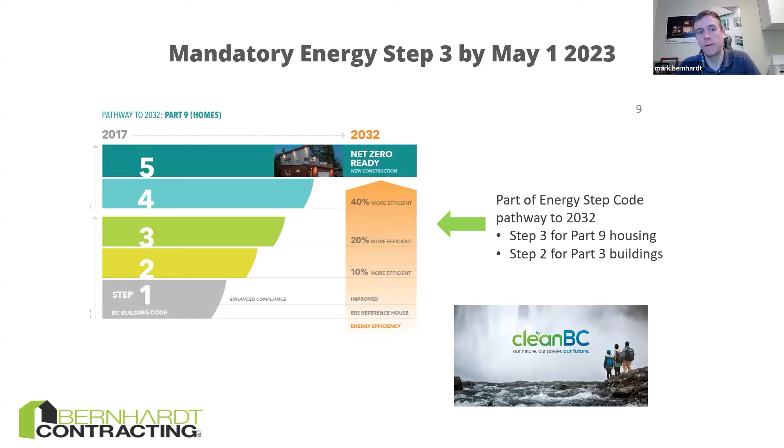So to get on it here, zero carbon step code. Let's see what's going on, I gotta find the right button here. There we go. Energy step code has been mandatory now in the province for some time, at the middle step. So by now, basically all builders should be familiar with this and have been using it. Really, this tackles one part of our journey as a building industry, and it tackles really only the energy side of things.

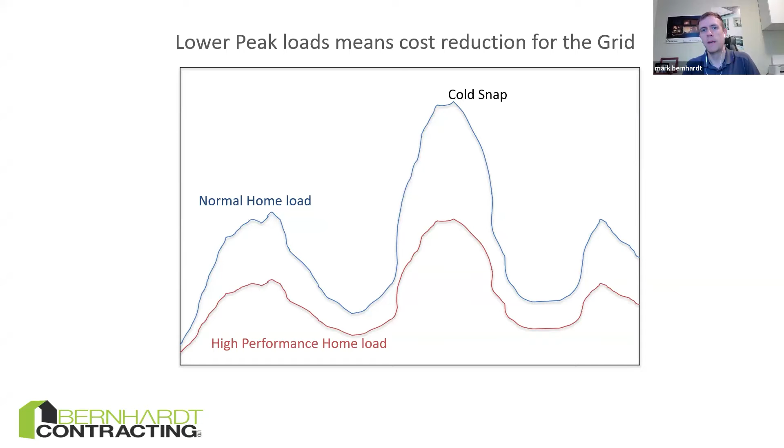Now energy is a big piece because these two codes do go hand in hand. When we imagine the energy use of a building, a normal home has a cycle - you'll peak up during the day or evening when you're cooking, you might have a cold snap and the peak load of the building gets really high. So your energy profile might look something like this - this isn't real data, I just drew this line with a pencil, but you get the idea. We can imagine what that would be in a normal home. A high performance home, like a step 5 energy step code home, will look something more like this.

And that has some pretty big benefits for us as a province, as a society. Now all of a sudden we can spend quite a bit less on our grid. If we imagine the peak cold snap of a regular house is using 971 jiggawatts - not a real unit of measure, but more fun - and the house that's using less is using half that, now we have to transmit and generate half the energy. Particularly problematic are those peak loads - we saw in the news lately that Alberta was having brownouts, and that's because of peak loads, typically not because of the base loads. And that's what energy step code is dealing with.

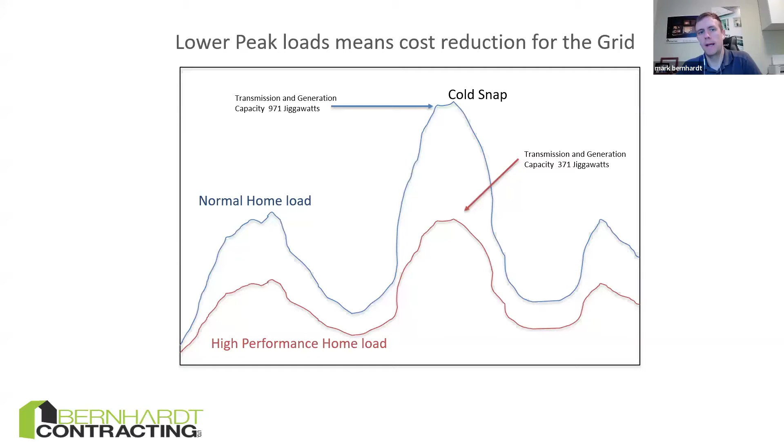It really needs to go hand in hand with the zero carbon step code, though, because energy step code deals with energy but not emissions. The second piece of this environmental code push is the emissions code, and that's where we need the zero carbon step code. When energy step code first came out, it was a little bit awkward because it was marketed as sort of the environmental solution to building. However, you could have a step 5 energy code house and still have a huge amount of emissions because you can hit that with a fossil fuel burning heating system. And if you had the lowest possible step house, as long as it was an all-electric system, its emissions were still a fraction of what that highest level gas-burning house was.

So that was a little awkward, right? It didn't really solve the problem of the emissions and the climate change parts of it. But we do need them both, because if we're going to successfully electrify and reduce those overall emissions, we do need to reduce our energy use as well to make that a practical, all-encompassing solution. So they go hand in hand. It's not one or the other; it's both, and we do need them both.

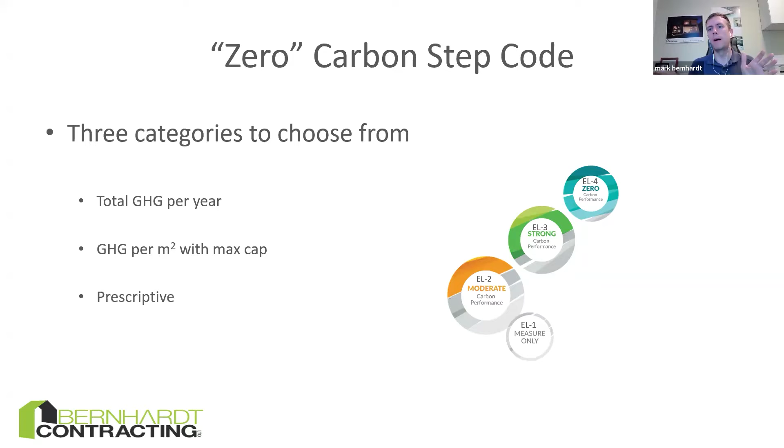Usually I'll separate that out and I'll say things like, this heating system is EL4 ready. What that means is if this heating system was used in a house, assuming everything else complied, that this house would meet EL4.

We are expecting that the first real proper implementation will still be measure only, sometime either end of this year or beginning of next year, with the medium being pushed to likely very late 2025 or possibly a little later, hopefully not much later than that. We'll get there. Is it as fast as the original timeline? No. But there's some political reasons for that, and some parts of the province aren't as ready as others.

It is a provincial code, and that's kind of one of the good things or the annoying things, depending on where you stand. A provincial building code kind of needs to be a one-size-fits-all thing. You have some flexibility in the ability of municipalities to adopt it and move faster, which my home municipality of Saanich and several others nearby have done. They've gone to zero carbon right away. Here in Saanich, that's fine, it hasn't been a big deal for builders, we're already well on the way anyways. That's worked quite well, but other parts of the province are not quite as ready. For a province to mandate something, we need to be a little bit more careful than we might need to be in Saanich, for example.

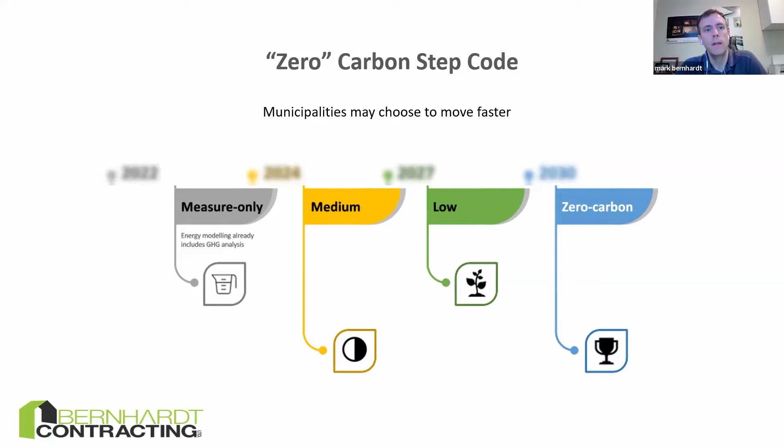There are generally three or four different levels. Measure only is obviously just status quo, we're not really doing anything, we're just giving you a result, which we've actually been doing for a while. But generally, as we step down, this is how it's supposed to look: at medium, we're decarbonizing the heating system - it's not always the case, but that's sort of the goal. At low, we're decarbonizing the heating and the hot water. And at zero, we're supposed to be decarbonizing all systems. What I mean by all systems is not actually all systems - there's some details to look at there, but that's generally the intention of the code, to have this step-down approach from one to the other.

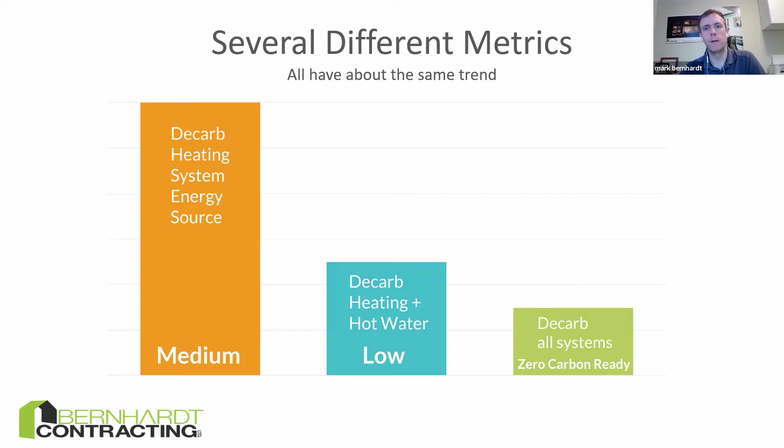As far as permitting goes, there has been a new permit form for the province that has been made. Our team made it. We're quite happy with the colors and things like that we chose.

Secretly, your energy advisor's been collecting this data the whole time. It's not any new work for an energy advisor, it's been on these forms - in fact it was on the old ones as well, but now it's just a bit more prominent. The zero carbon step code level is on page 1 of the form, and it says what is required and what your house is proposed to meet. So it's there, it's no extra work for your energy advisor to do this, no extra energy modeling required - it's all built in.

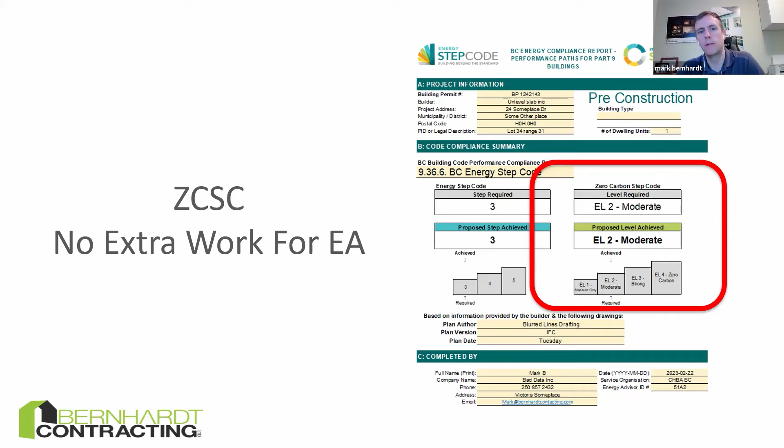Now, getting into the details of this code, this is really where things start to come out as to where we can be effective with this code, where it might need adjustment, or where there is potential relief for those worried about some parts of it. It really matters what we're counting and what we're not counting. I've mentioned that zero does not mean zero, and all systems does not mean all systems. So let's look at what I mean by that. What are we counting and what not?

Principal heating system, that's the heating system designed to take the entire load of your house. Maybe that's a group of electric baseboards, maybe it's a heat pump, maybe it's a gas furnace. That is going to be counted within this code, fully counted.

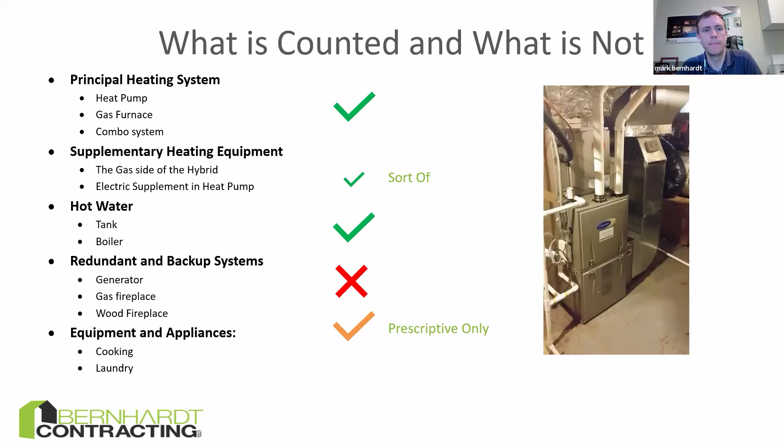So let's dig into some data here.

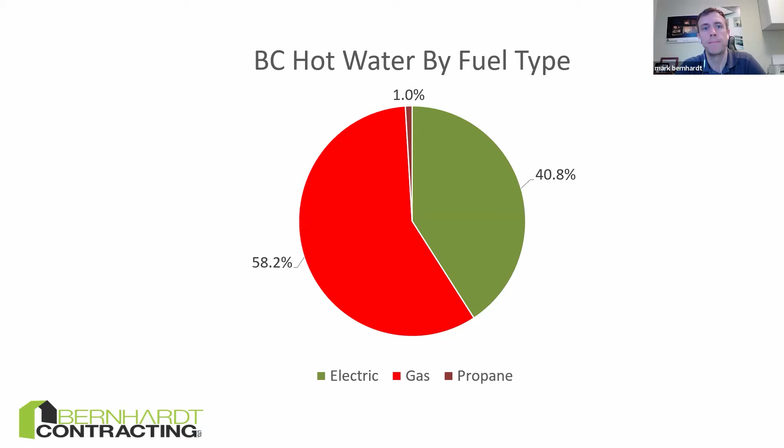So when we break this down, we do see that about one-third of the homes in BC are what I'd call EL4 ready—already doing what they need to do to get us to that top step.

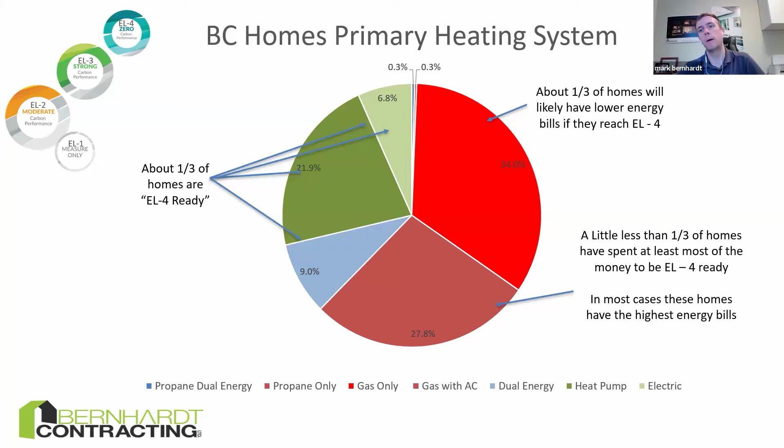And that would include that blue area, which is the dual energy, because they have that heat pump in the mix - they're good to go. About a third of homes are using gas only, and as a result they're probably having higher energy bills than they would had they installed at least a dual energy system at some point.

The one I'd really like to see change quickly is the little less than a third of homes that have spent most of the money to get to EL4, but aren't using their systems to full potential. If you're installing gas with AC, you already have a trade that knows how to install a heat pump, the wiring, the power capacity, indoor units that are very similar or identical to heat pumps, and an outdoor unit that's very similar or identical too. So why not just get a heat pump?

I think this is really low-hanging fruit, that roughly 27% there. In many cases this group will have the highest energy bills of all the groups, because you're getting the worst of both worlds - you're not using the full potential of the system you've already paid for.

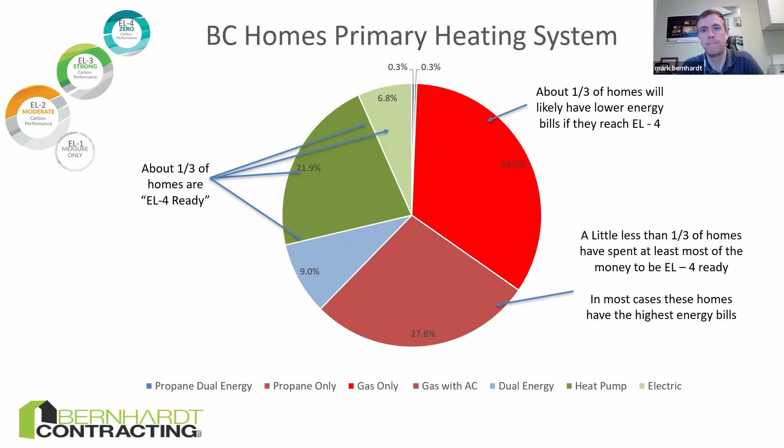So this is really low-hanging fruit, a place we can do a lot better very quickly. And as I've mentioned before, this is a very regional thing. If we look at Vancouver Island, we're about a quarter not EL4 ready. In Kelowna, they're about a quarter EL4 ready - it's opposite. But notice in Kelowna 71% are using gas with AC, meaning they've already paid the money to have the equipment to be EL4 ready. Let's just make that jump - this is very, very low-hanging fruit.

Interestingly, as we go up the energy step code, this table shifts quite dramatically. On Vancouver Island, going up to step 4 from step 3, the EL4-not-ready percentage only drops down to about 10% of homes - a very low percentage of homes not already ready on Vancouver Island.

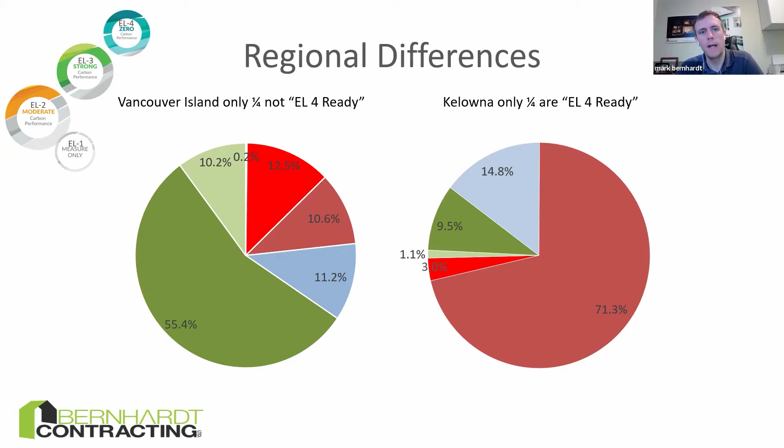And some low-hanging fruit elsewhere too. Where I see this policy being easy or not easy is really regional. In areas with less cooling - where cooling isn't common, like maybe Vanderhoof - you're probably not installing any cooling equipment, so there's probably not a trade in town, and not much experience with that. That's where this policy may run into issues and hurdles.

In areas like the Okanagan, central interior - anywhere you're already installing cooling, even if mostly a gas region - you already have the trade, the power capacity, all these things. The supply chain is there to make that switch very quickly and cost effectively. In those more northern areas, that's probably where we'll see the speed bumps.

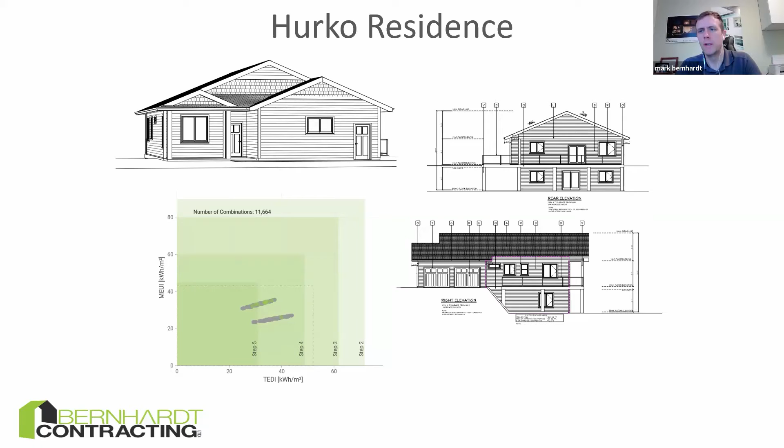I want to look at an example house - this one's actually in climate zone 6, in Quesnel. Nice little house. I really like it because it's kind of your average Joe type house, literally built by a guy named Joe. I wanted to show where this house falls.

If we look at the data across the database, most houses show up in that zero carbon ready zone. Actually, I think this might be a database for Vancouver Island only, because of that big spike in the green - so this might be what Vancouver Island looks like, not the full province. But if we plot where the code falls on this, we see the levels roughly line up: everything on gas, one thing on gas, and then nothing on gas. Why the gap between zero and strong is so small, you'll have to ask the code makers - it's actually a pretty hard target to hit that little zone, and very few buildings actually hit it, so there's maybe an argument we don't need that zone.

But if we take this house and just build it code-built using all gas, no surprise - it hits way out in that area, and it's not going to qualify for much.

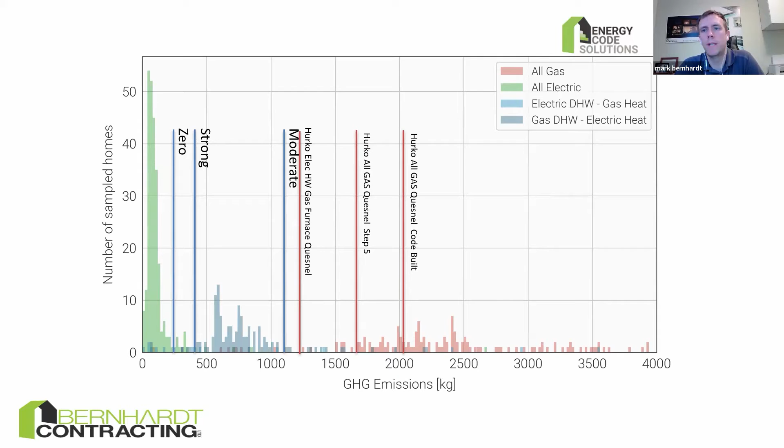If we build it to step 5 of the energy step code, we take a big jump down. Makes sense, we're using less energy. If we go electric hot water tank, we take another jump down, but that's starting to look scary because now we haven't even moved into the moderate zone on this particular metric. But luckily we have those other metrics, and actually these two scenarios do qualify moderate on the other metrics.

If we keep going and move that house to Victoria and make it step 5, we can qualify moderate because Victoria is warmer, we're not using as much heat. If we take that house and do a hybrid heating system, we take another jump down. If we take that house with a hybrid heating system, or dual energy system as I've been calling it, and electric hot water, we go all the way to the top.

So we've still got a gas furnace in this house, but the majority of that heating is going to be done by that heat pump, and the gas only comes on when it's very, very cold. And electric hot water, which would be cheaper to install. So we can get there relatively easily.

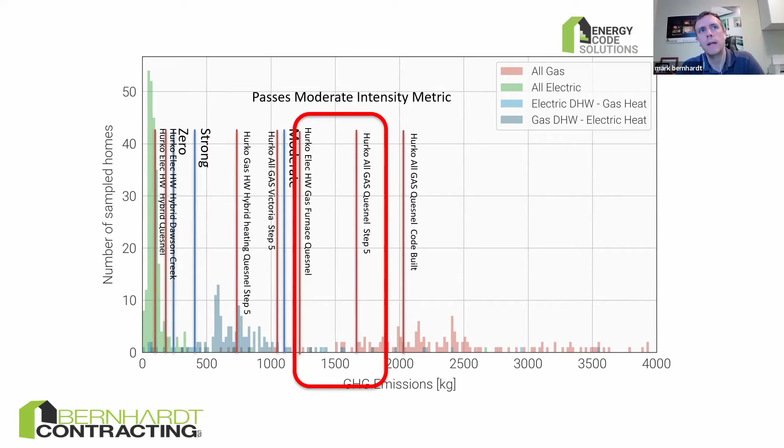If we take that house and put the same thing in Dawson Creek, it does move up a little bit. It's colder, but we're still well within that zero target. So it's quite possible. Wanted to divert now to talk about heat pumps in cold climates.

I've just introduced the idea of using a heat pump in Dawson. Pretty cold there, not necessarily seen as the ideal location for a heat pump. But it is certainly possible. Whether it's practical today, we'd have to talk to people on the ground there to see, because there may be a lack of trades and all sorts of things. This is a market that's really just emerging in these areas. It's not something you can walk down to your local hardware store and pick up the way I can here in Victoria. But they do work.

This picture I'm showing is actually in northern New Brunswick when I was out there doing some things. I thought it was really funny - it's this old church, uninsulated, and they've got three heat pumps lined up outside. They actually converted from an oil furnace. The reason I know that is because I was taking pictures of the church and the priest came out and said, 'Oh, are you interested in the architecture of the church?' And I said, 'Well, actually, sorry, I'm only interested in your heat pumps.' He thought that was weird, but Catholic priest being forgiving, talked to me about it anyways.

So apparently they basically couldn't do mass in cold temperatures because the uninsulated church meant the oil furnace wasn't keeping up. They switched to these heat pumps a number of years ago - they're not new. And now they can have mass at minus 30 and the whole church is warm. So they do work. What they've done is propped them up off the ground so they're out of the snow, and covered them because they get icicles dripping off the roof, to protect them from that and the deep snow, and they're working very well.

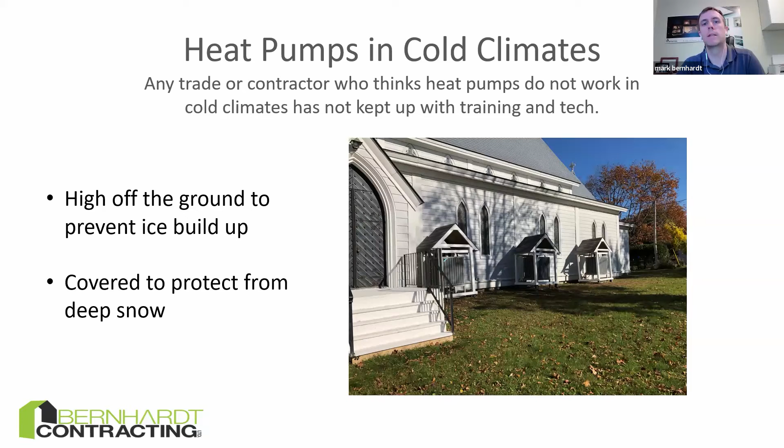So they absolutely work. Anybody out there telling you that they don't work maybe needs to update their training. They absolutely do work. But there are some other considerations we want to take into account.

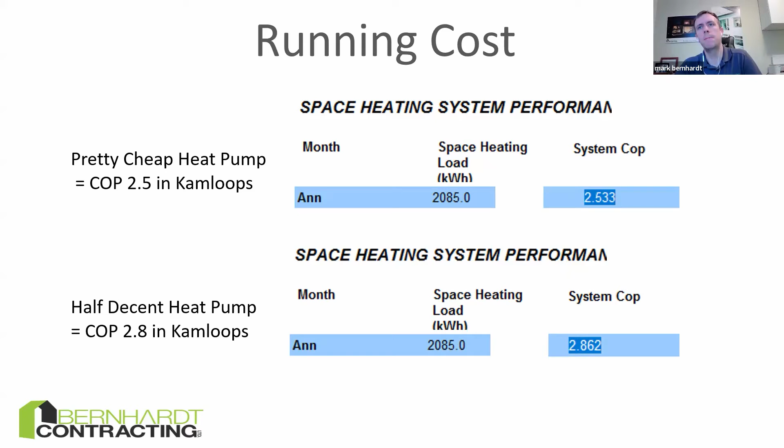If we look at something like this in places around the province, take a pretty cheap heat pump and put it in that house I was using as an example, and move it around a little bit. A pretty cheap heat pump, if it's in Kamloops, is going to have a COP of 2.5. What I mean by COP is coefficient of performance - that's 1 kilowatt of electricity goes in, 2.5 kilowatts of heat come out, so we'd call that 250% efficient. If I make a half-decent heat pump in that same house, it's going to be 2.8 - better heat pump, better results.

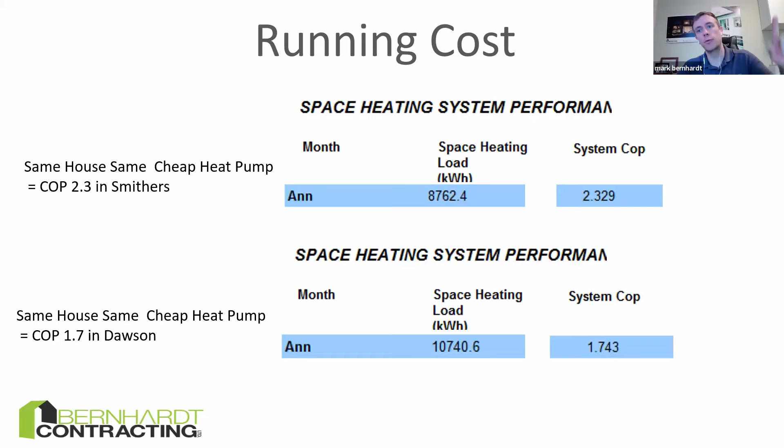If I move that around to different places like Smithers, I get 2.3 on the cheap heat pump. And then if I move to Dawson, I get a 1.7 - so 1 kilowatt in equals 1.7 kilowatts of heat out. Now why that matters is because we're all thinking about cost, right? Inflation and whatever, but we need to know what our running cost is going to be.

Often the criticism is that it's going to be way too expensive to heat with electricity, or my heating bills are going to go way up if I switch to electricity, because electricity sells for more money, which it does in most cases.

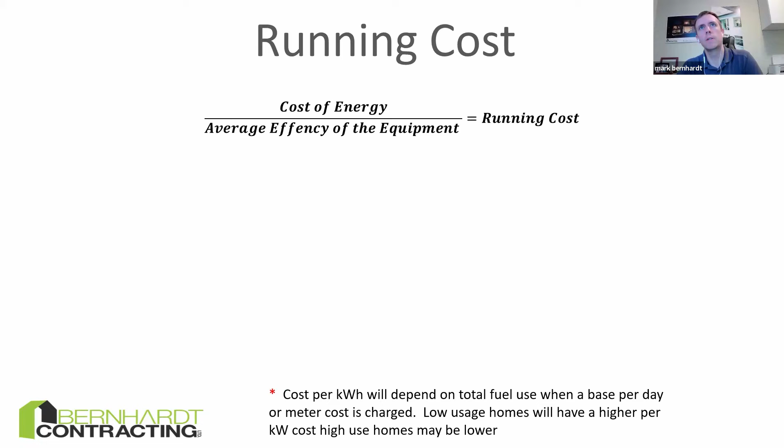So the way to figure this out is cost of energy divided by average efficiency of the equipment equals our cost to run it. Fairly easy to figure out.

In the north, you have Pacific Northern Gas, and they charge different rates in different towns, a little different than Fortis. In Fort St. John, they charge about 12 cents, at least last time they published their website. So 12 cents divided by 95% efficiency of the gas system equals a running cost of about 12 cents. In Vanderhoof, they charge 19 cents, which is wild that it's actually more than electricity there. So I have a running cost of about 20 cents if I'm burning gas.

In Kamloops, Fortis is essentially giving away gas for free, and what they're really doing is renting you the meter. That's how Fortis makes their money, the connection, and after that they don't really worry much about how much gas you use. That's why you see that caveat at the bottom: if you have a high gas load house, your per kilowatt gas cost is probably a little less; if you're not using very much gas, it might be a little bit more.

So take this with a little grain of salt. We can debate whether it's 6 cents, 5 cents, or 7 cents. Either way, it doesn't matter, the math formula is still the same. But that's going to come out to about 6 cents a kilowatt for running cost on that.

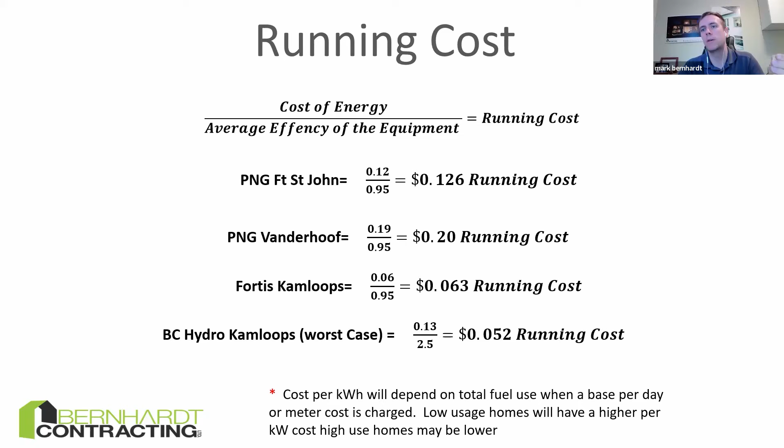If we take a really worst case scenario, BC Hydro, Kamloops again, the average cost of electricity is somewhere around 12 cents, but let's say it's 13 just for the sake of argument. If we take that 2.5 heat pump, that cheap heat pump, I'm going to have a running cost of 5 cents. So it is the cheapest option for running cost, simply because the equipment is much more efficient, and that overcomes the higher cost of the fuel.

Now let's look at the other piece, because you're often told that you're going to have a huge supplementary system, often called backup, to run these systems or make them work, since they're going to shut off when it gets cold, right? Well, if we're using half-decent systems, that's not quite true. It's not that simple, and there's lots to consider there.

So I'm using the example of the Samsung Hylex system here. It's a decent heat pump, and you'll notice it's actually labeled as a central air conditioning unit. This has led to a huge amount of confusion in the industry and elsewhere, where some of these systems are being installed and set to be air conditioning only, even though they are fully functional heat pumps, which is, of course, a huge waste.

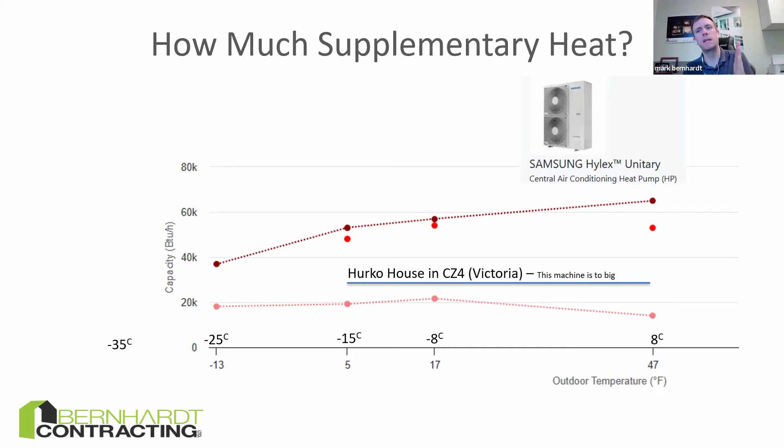This is the example I'm using, and I'm using that same house I showed earlier. If I take that house and put it in Victoria, this machine is actually too big, but you get the idea. Victoria minus 15 is like deathly cold, and we're not going to get much colder than that. So this heat pump would cover 100% of the load, it's actually a bit too big, we want to use a smaller one.

What we're looking at here is this top line is the upper end, the maximum this can do, and the lower line is the minimum this unit can do. What we want to be doing is sizing our heat pump so that we're always in that operational range of this house. So in Victoria, this machine is too big, we've got too much operational range above the line there.

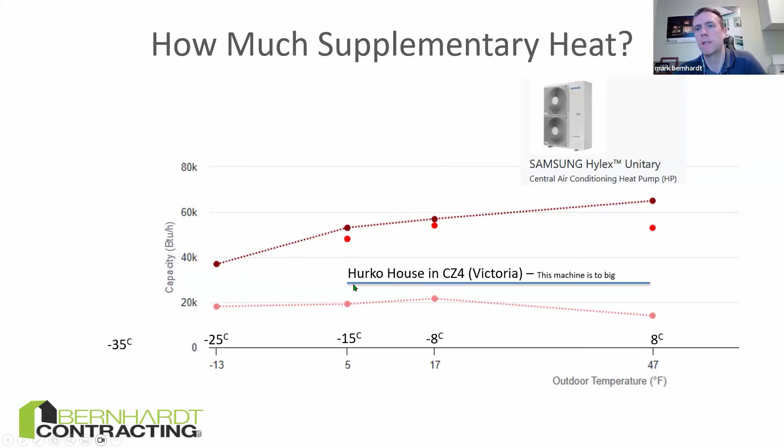But let's say that we move it to Penticton. A cold day in Penticton is minus 25, every now and then might dip a little below that, but pretty devastatingly cold in Penticton is minus 25. This same house has a little over 40,000 BTU heating load, we're in BTUs here, which annoys me, it should be in kilowatts, but all the mechanical stuff's done in BTUs. So for most of the year, this heat pump's working great.

It's doing all we need, but we've got this little triangle here—that's where supplementary heat comes in, where the heat pump's ability to keep up has dropped below what our maximum need might be. And we're talking maximum load here. When we design a system, we're doing the worst case scenario, the absolute coldest day of the year. That's what we're designing for.

I don't know how long it stays at minus 25 in Penticton—probably not very long, maybe a week sort of thing. I think the cold snap this year was about a week. So it's not huge, it's a small bit of supplementary. In this particular house's case, that's about 2 kilowatts, which you could probably do with your heated bathroom tile. It's not a huge amount of heat.

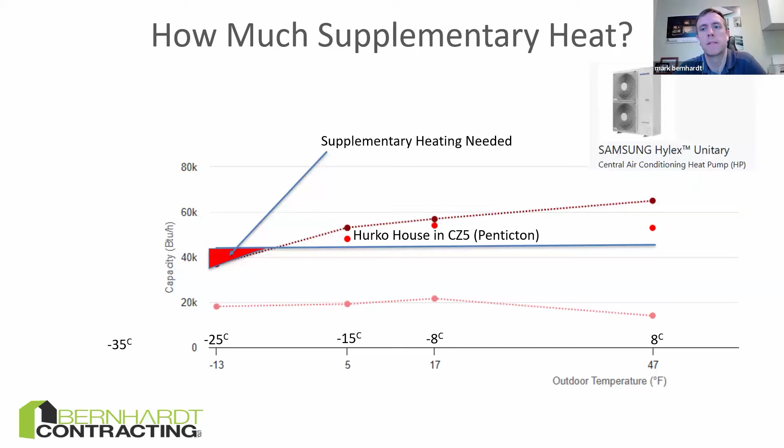It's not this big separate furnace that we need to put on there, and we don't need 100% backup, right? If we have a 10 kilowatt furnace, we don't need a 10 kilowatt supplementary to match that. It means our electrical load is quite a bit smaller, our panel size is quite a bit smaller, and quite a bit cheaper.

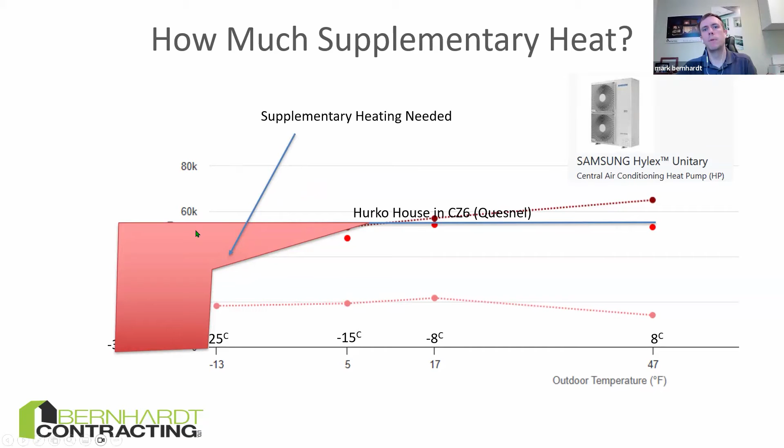If we take that same house and move it to Quesnel, climate zone 6, now we do have a full need for supplementary systems. And again, this is where it gets more complicated—we're not a one-size-fits-all province, right? For the most part, most days of the year, we're in a good range, and the heat pump's going to be doing a whole lot of work.

But do I have time? Yes, I do. For about 1 week a year, we're going to get into that minus 35 range. And at that minus 35 range, this heat pump may still function. In fact, I do know this heat pump is capable of going down past minus 25, even though it's not rated for that.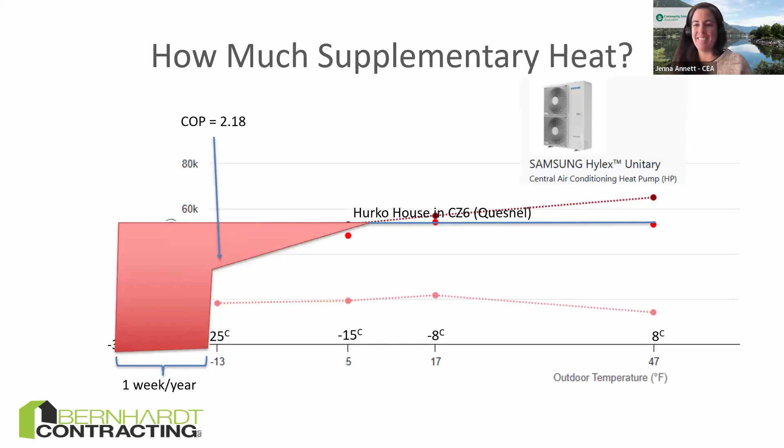Oh Mark, we've lost your audio again. Can you hear me now? We can hear you now. Yeah, we're back, okay, cool. All right, well that's good—didn't have to do the old turn it on and turn it off again.

So in this situation, we probably are going to need some full supplementary system. So this is where, if we have a 10 kilowatt heat pump, we're probably going to need also a 10 kilowatt, maybe electric resistance or something to keep up. And this is really where the rubber starts to hit the road in terms of complications and maybe extra cost, because that electrical service load is probably going to need to be a bit bigger. So it's not totally smooth sailing in these colder places.

It's manageable, we can do it. In most cases, it's going to be a cost implication more than an absolute physical barrier that can't do it. In terms of cost, we're talking about 1 week a year where we're using primarily electric resistance, maybe 3 to 4 weeks a year where our heat pump is doing at least most of the load with a little bit of electric resistance, and then the rest of the year we're using full heat pump—which means over the course of the year, this is probably still a more cost-effective system than maybe having a fossil fuel burning system.

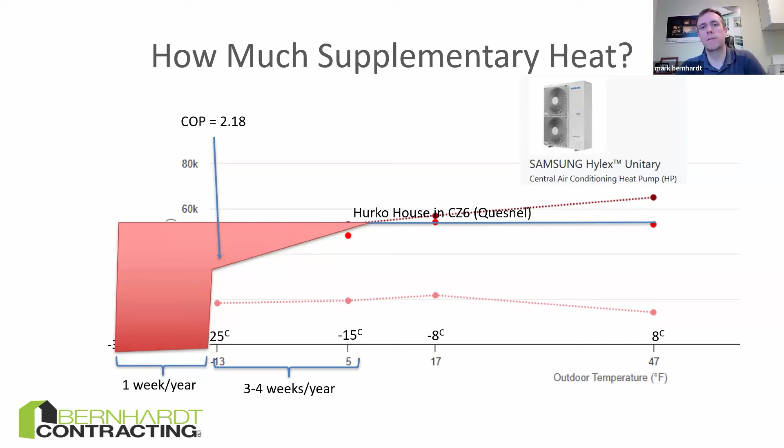All right, we're looking at 8:48, so we're right on time. Perfect.

Looking at some case studies now—we've got some case studies scattered around the province here. Got kind of an average single family home, I'm pretty sure this one is actually in Penticton. If you look at the stats there, it's a very normally built house. In real life, I believe this one actually got to step 4 of the energy step code, but we've sort of dumbed it down to be step 3, so it's like a proper minimum code type house.

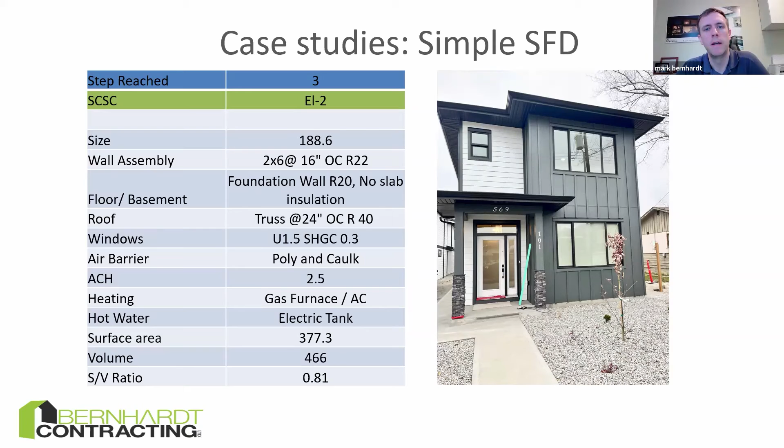What we've done—and these slides will be shared so you can review it later, so I won't go through it in great detail—is make a kind of matrix. So if you want to say, well, I want to do energy step code 3 and emissions level 4, we can line it up like your kids' times table and see what you would have to do. We've looked at what changes would be required. So if we wanted to get to energy step code 4 and emissions level 4, well, I just need to reduce my air leakage to 1.5 and use a dual energy or all-electric heating system.

This house already had an electric tank in it, so that's a pretty small change. I would already have an AC unit in this place, so all I'm doing is taking that AC and making it a heat pump. Pretty small change. The air tightness is quality controlled by the site team, by the build team. These are pretty small changes.

You'll notice on the list too, sometimes we say low-end heat pump. This isn't some fancy Mitsubishi high-end thing. This is a low-end, probably contractor grade heat pump. These are not necessarily big fancy things. And in many of them, you'll see notes saying full gas system is still okay. So in many cases, it's actually not that restrictive.

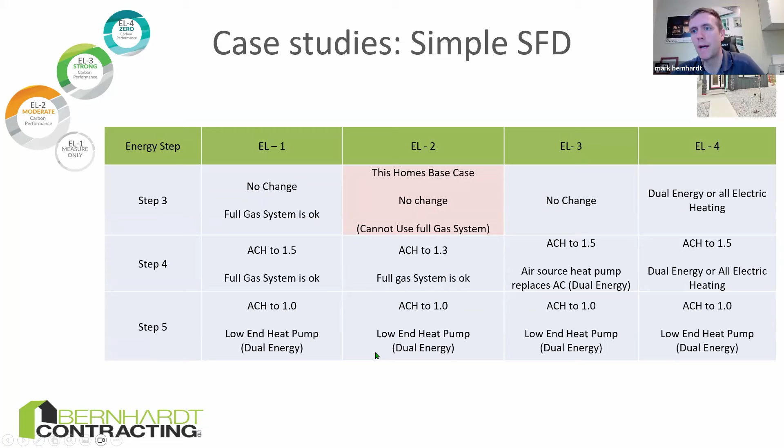In this particular case, at step 4 EL2, all we've done is we've reduced the air leakage a little bit beyond what is required, and that allows us to still have a full gas system. So still lots of options to be able to do it.

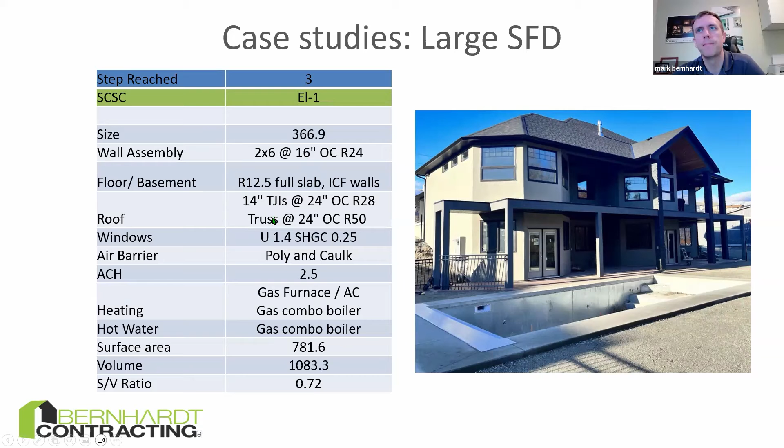Where our options get a little thin is when we get into the higher end stuff. This is a big house, pretty fancy house. You can see the pool in the front there. This is a house that started with gas furnace AC as well as a gas combo boiler. That's a boiler that's doing hot water and in-floor radiant heating. Much more complex type of house, much higher energy load as well, much less efficient house.

This one is somewhere in the Okanagan, I can't remember exactly where. But here, even with that much higher complication, to get to the emissions level 4 and step 3, all we need to do is switch to an electric hot water tank, not a big deal, and add a heat pump to the heating system. Again, not that big of a deal. We've already got air conditioning there, so we're switching that air conditioning to be a heat pump. The gas boiler can remain for the in-floor radiant heating. That would be considered a redundant or backup system.

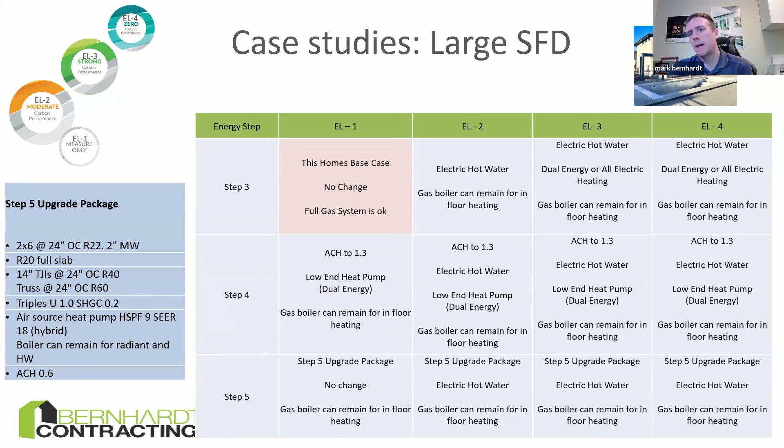So like I said before, EL4, which is called 0, is not 0. We can still have gas use within the house. Now, to get to step 5 with this house, we do need more upgrades, and that's simply a function of the energy step code and this being a complex house. That's why it needs more upgrades to do that. You'll see some more changes listed there, but still essentially the same idea. It's a heat pump and electric hot water tank that gets us to emission level 4 relatively easily.

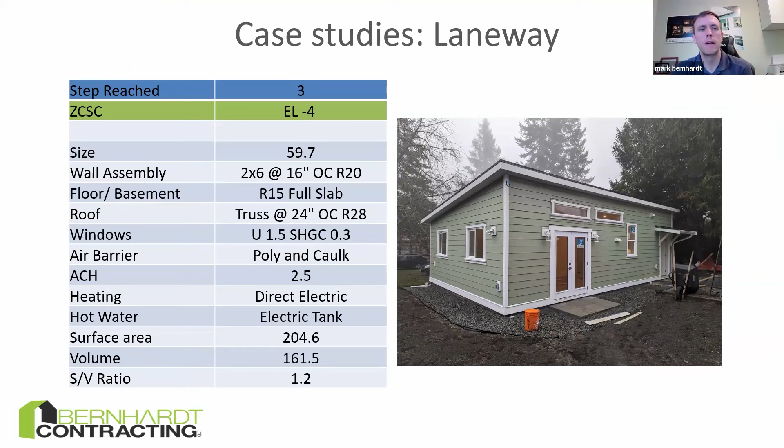If we go to a laneway type house, I believe this one is on the North Island in real life. Very, very inexpensive type of building. In this case, there's not a lot of room in there for furnaces and things, so it makes sense that it would have electric systems, and therefore, even at step 3, it's already at the top carbon level as well. So fairly easy to get there with a building of this type.

And even at step 4, all we're talking about is a low-end heat pump. That's probably a ductless mini split, mounted on the wall or something like that. And now with our cooling requirements that BC has introduced as of March 8th, that's likely required anyways. So for the emissions codes, we're probably going to hit that just by default with a place like this.

This one also did need some upgrades to get to step 5. But if we look at what they are, that's step 5 of the energy code: R40 in the ceiling, R22 in the walls. These are very generic buildings. These are very small upgrades. So the upgrade package for step 5 in this particular house gets us all the way to the top emissions level and all the way to the top step code level.

So this is a little box. It's a very easy house to get all the way to the top on everything without really spending a whole lot of dollars on this.

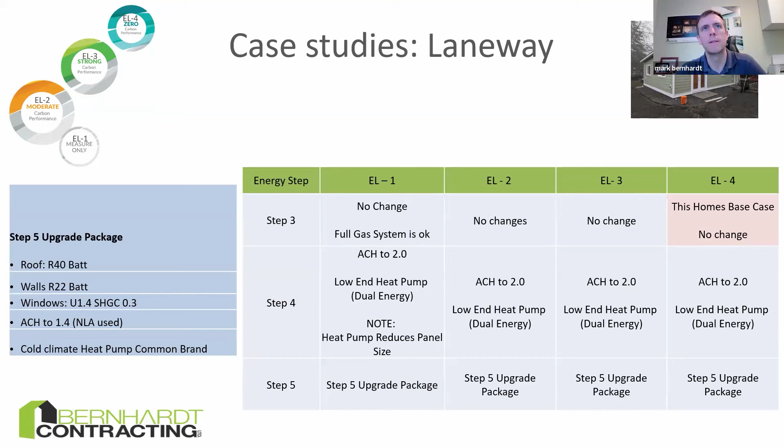So the key messages I want to leave you with are these: many homes across the province are doing this already. So it is not impossible in any location. There are houses in every location doing this already.

Some regions are more ready than others. Some of those regions, particularly the cold regions, the trade supplies and supply chain, that's not quite there. We do have in some regions power limitations where we might not be able to get as much power as we need to our new homes.

So it's not a one-size-fits-all thing. If you're advocating or working in your particular region, it's important to look at those capacity things and deal with those problems before jumping up the levels the way Saanich has. And Saanich has been reasonably successful at it.

We're pretty ready for things like that here, so it's not as big of a deal where I am. The third thing is that simple, small changes allow homes to reach the top levels. It's not big, huge ground shifts where we're totally changing the way we're building these houses. A lot of times we're just switching an outdoor unit that looks identical with another one - in fact, many cases they are identical. We're just changing the programming on it.

So these are simple, small changes. This is not a massive change by any means. And doing those simple, small changes can have a huge effect on the emissions. It can have a large effect on the energy bills of the occupants. And quite often what we're seeing is actually a reduction in cost, not an increase.

All right, thanks so much Mark, and thanks everyone for attending. This is an incredible session, I really, really appreciate it. Thanks for having me, it's been fun. All right, take care everyone. See you.